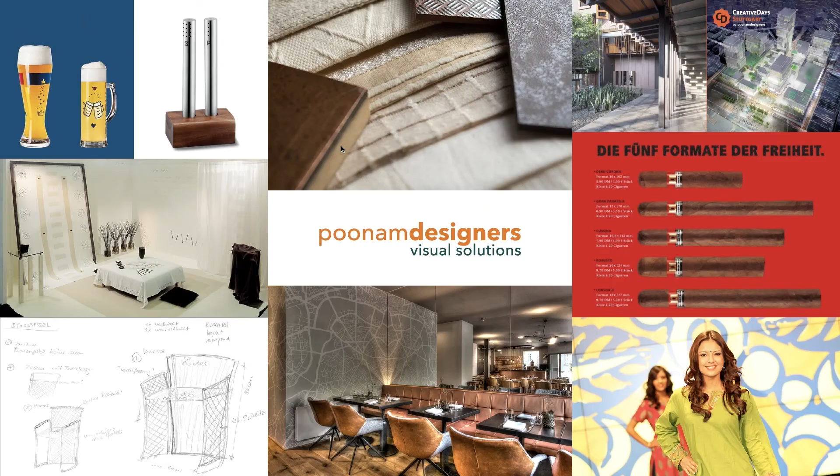We founded the studio in 1994, and since then our interdisciplinary studio shifted its work from textile and product design, communication design, to product and interior design, visual communications, research, installations, curation, and events.

And from the beginning with us - now Ravi, it's your turn. Our son Ravi, are you somewhere here? Supporting us with his input and everything. He's also studying architecture now, so it's great - it's like a family business now.

We work across the disciplines and intercultural. We think local and global, and we think in context. And we love the slogan by Eliel Saarinen, who said it perfectly: always design a thing by considering it in its larger context - a chair in a room in a house in an environment in a city plan.

What drives us? Our passion for interdisciplinary design projects and our never-ending curiosity towards other cultures. We believe in a holistic way of looking at design and architecture. And for this, we founded the Creative Days in 2016, an interdisciplinary and international platform, giving design, architecture, and urban planning a platform for exchange, networking, and presenting out-of-the-box projects and people.

This platform consists of a symposium and different events which explore design and architecture at different locations in Stuttgart. Usually it takes place in July during the Indian Summer Week, and as I said, we are delayed this year. One of the guest countries is India because of the town twinning between Stuttgart and Mumbai.

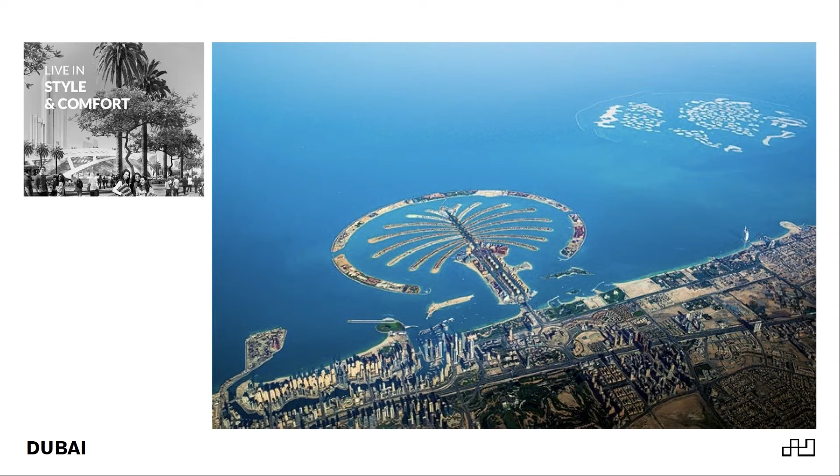You may even see 'live in style and comfort'—that's the advertising of something like that. That is not necessarily the kind of city we hope for.

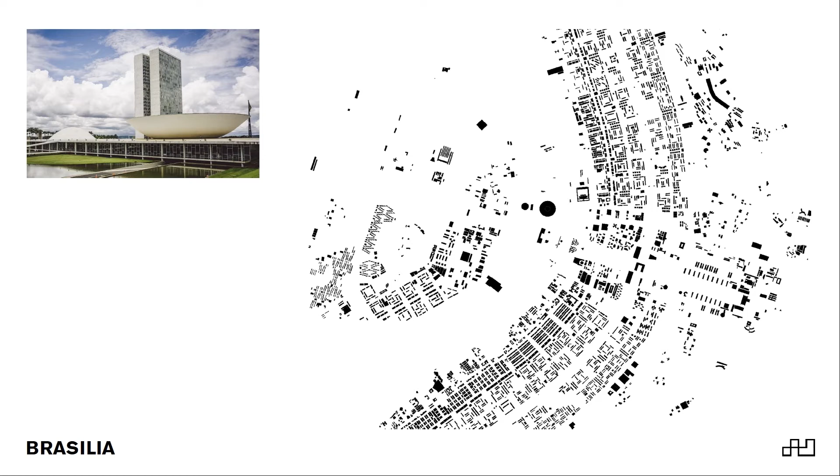I think the experience of, for example, Brasilia, which is a city that was planned as a structure from its very beginning, shows that a structure planned from its beginning and carried out exactly as planned is somehow working, but it is not something where people say, 'Oh, this is a city where we like to live.' That is not a city that is lively or interesting, except for its outstanding punctual architecture. But I think as a city, it is very much a problem.

And other cities start from a very clear plan, from a center—this is a screen, meaning the point doesn't work here, right? So I have to... you think it doesn't matter?

There's no point here. No? Here's a point, here's no point. Good, okay, do we have a mouse? The pointer works, you just saw it. Where do I have to stand that I see it? It's hard to point somewhere where you don't see where the point is. I mean, I don't see the point. Okay, so anyhow.

You see the castle, right? The castle was the center of this urban planning. It started out with this radial system, and it was carried out up to a certain point. From this point onwards, the city was starting to grow. It was no longer a systematic scheme set into reality, but the city was starting to grow.

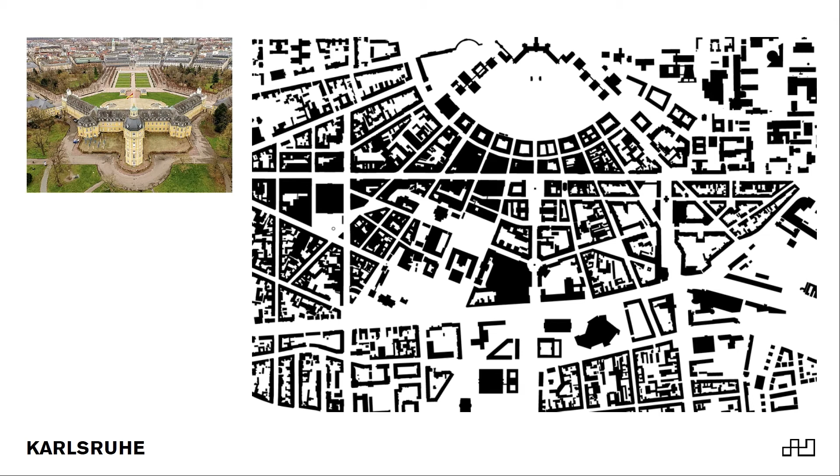This is something different from just the master plan that is carried out through all time. This is something that is working better, as far as I can see.

On the other hand, we have the other way around. Here we have a city that from its beginning—you see the city center, don't you? So this city did not start with planning, but it started with growth. There was something interesting in the way the shore is shaped, something that made people go there and found a city.

And then the ensanche—this is Barcelona, in the 1850s, I think—there was this structure imposed there. But this is something, in its scale, that is a very rare example of planning on this big scale that really works, and the city is really happy with this area.

But still, there is something about growth in the middle, and something about planning in the outskirts, and the city developed further, and then again it started to grow. So it's not about a city planned in its entirety, but one with certain quarters that are either growing by chance, by accident, or planned quarters which continue the city.

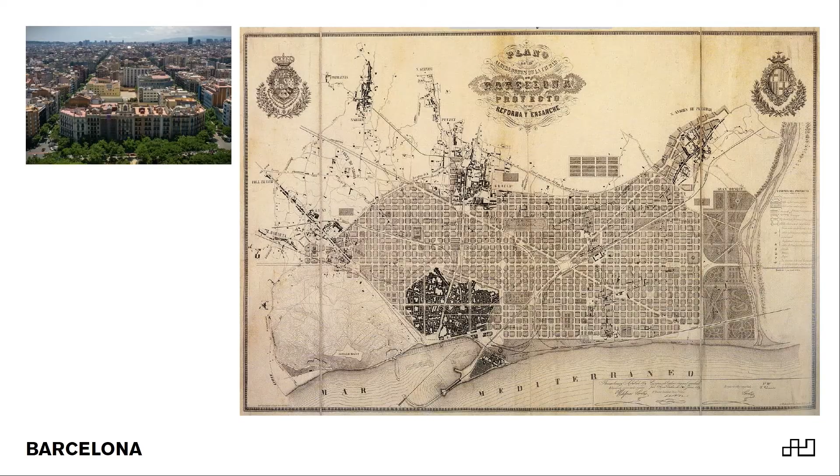And then there's something in the city which is, well, palimpsest—the constant overwriting of an existing area, of the existing ground. This is the most important thing also for the future of the city. We have to know that everything we are doing is not the end of the development. It's just a part of something that will continue to develop itself, so to speak. It's not that we are the masters of the scene, in a way.

I found in Ulm, close to Gingen an der Brenz where I come from, a quite neat example: the Münsterplatz. You all know the Ulmer Münster—not with this tower though. That's the tower up until the 1870s, when the city of Ulm decided to build the highest church tower in the world, and only after that the final tower occurred. That's how the church appeared for about 500 years. They started in 1377. But look at this Münsterplatz.

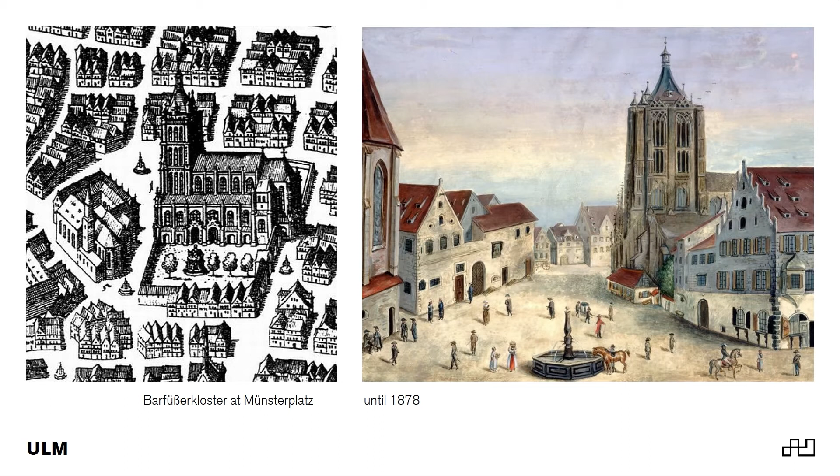To the left, you see there was this sort of cloister area with a small church attached, a framing of the Münsterplatz. Then they tore down this Barfüßerkloster in 1878, and for a long time the Münsterplatz was empty—there were just little kiosks or a bus stop or something like that.

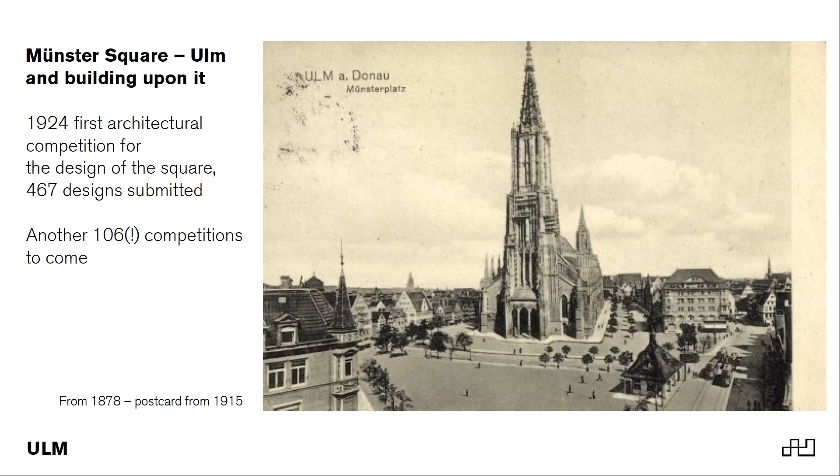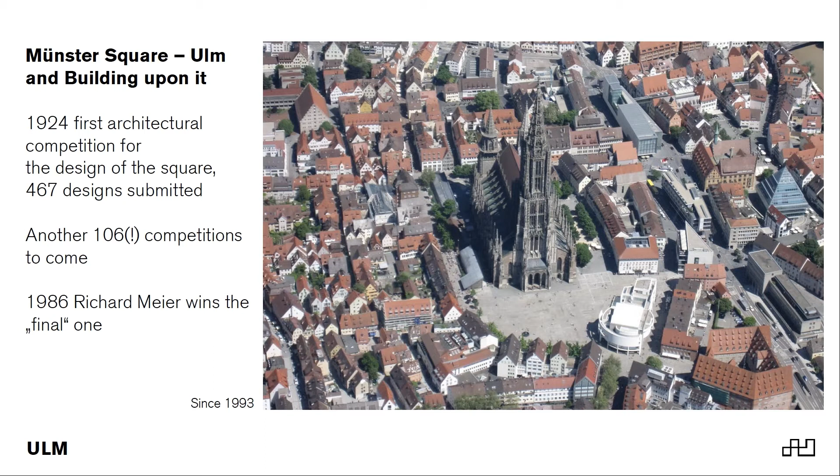For something like 80 years and 106 competitions, they discussed and tried to find out what to do with the Münsterplatz. Only in 1986 did Richard Meier win the competition for what was finally built. So at this point, you can easily say that we have constantly overwritten this Münsterplatz with different buildings, and we are only part of something that is continuing.

Edmund Bacon, in his Design of Cities, described this as the principle of the second man. If you are working in the city, you have to see that you are part of a development, and you have to read the entire scenery. You have to try to find out what is there, try to understand what perhaps your predecessor meant, judge what he or she did, and find your own approach, your own opinion toward that—how you develop it further.

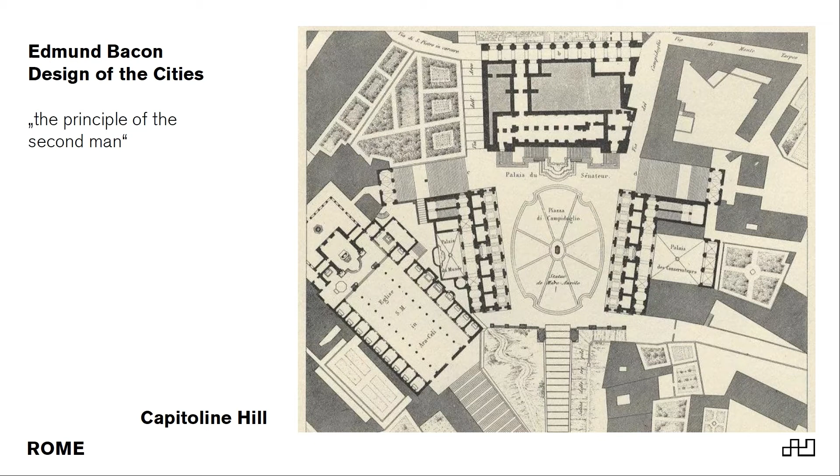He judged that the existing situation to the left was not a good thing, so he put a new facade to the right—not a new building, just a new facade—and to the left a new building, which made him achieve this perfect square, finding an appropriate place for the town hall of the city of Rome. This principle of the second man is something very sympathetic to me.

Certainly the church was no longer, at the time, used as a church, but as a training area for young people.

Now, how do we put this into urban scale? The church being there, we decided: we have the main geometry of the church, with the length of the church being the width of our new building. So it turns out that the church is fully integrated.

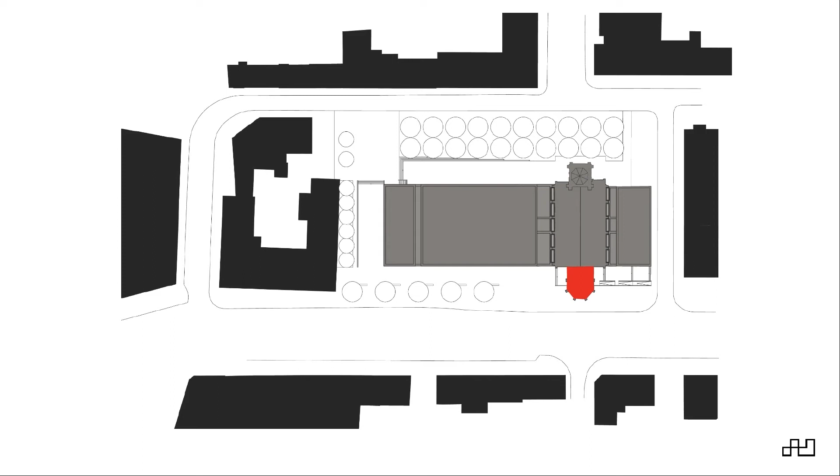The red lines show this—the main facade of the building is stepping back a few meters, opening up a situation for an entrance plaza, and this entrance plaza is governed by the former choir, now being the entrance of the concert hall.

If you look at the plan, you realize the former entrance of the church was on the other side. That is clear for everybody familiar with churches—the entrance was on the other side. So there was this little discussion: is it appropriate to put the entrance at the choir? Because you never, ever have an entrance at a choir.

But this church is no longer a church, so I think the meaning of the liturgy is no longer there. And if you think further back in history, you'll find this type of building was not invented as a church, but as a market hall in Rome, for example. So there is a way of dealing with that.

The entrance is certainly on this side because the main street, Victoriastraße, is on this side. So we have to put this building and the new structure into the system of the existing city.

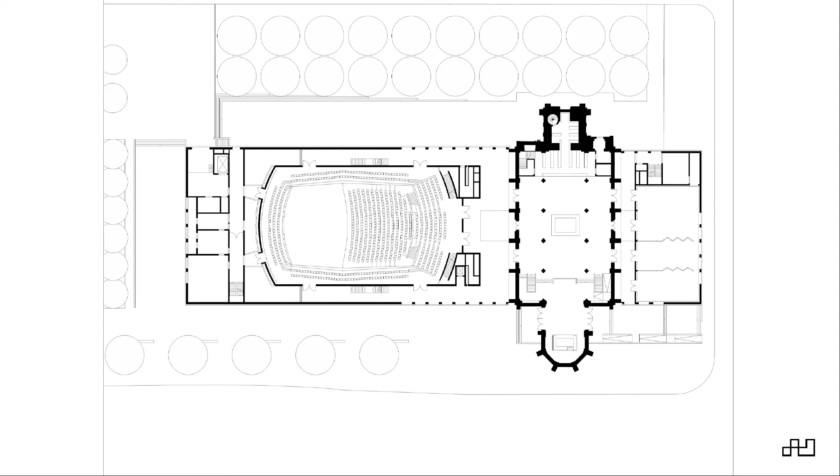So it turns out to be a silhouette where the new masses respect the church. They are lower than the church ceiling, and they respect, with their distance and their seams, the volume of the actual church building.

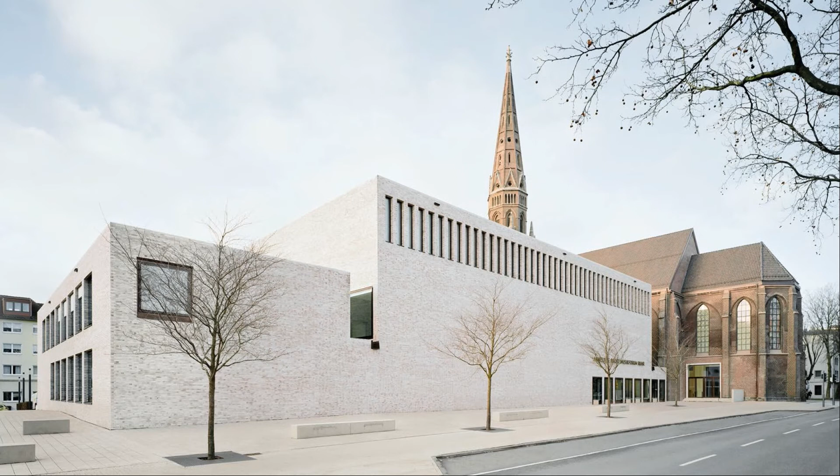So in a way, there's the first man, to come back to the principle of the second man. The first man sets the theme with the existing church, and we have to add onto it, perhaps define the second theme, to make it a unified building.

The interior space is about the composition of highs and lows, and another low, and another high, which is the concert hall. In section, you see this creation of a spatial topography linked to the level of the city, which is the church level, and it digs a little into the ground, which is then the stage level, and also rises up to have the proper volume for the hall.

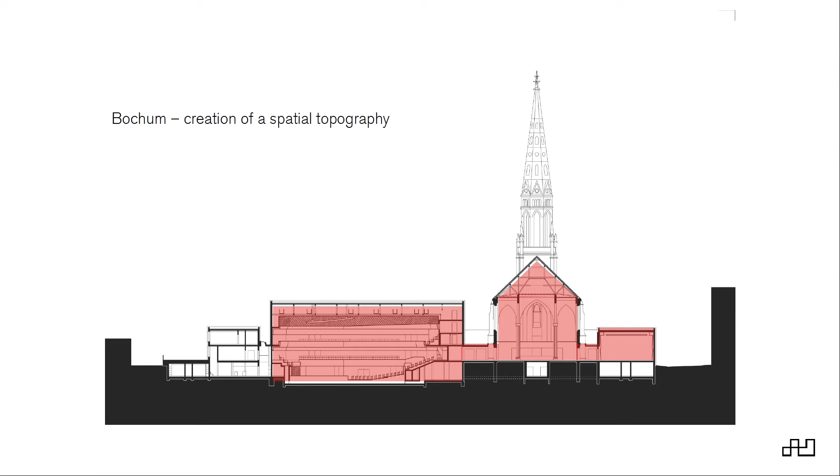Bochum, being a creation of spatial topography, contrasts with the museum in Arnsberg, which deals with a found topography. That is something different, because in this case the topography was the most decisive circumstance influencing the design.

Where is it? Here it is. The entrance is certainly to the left, in the old part of the building. If you have to go all the way down, it's like 25 meters—there is certainly an important path going through the building.

But it's not only the building at its interior—the exterior, the sculpture and form of the building, enables and emphasizes existing paths in the city, leading from the top of the hill, at the top of the picture, to the bottom of the hill, at the bottom of the picture.

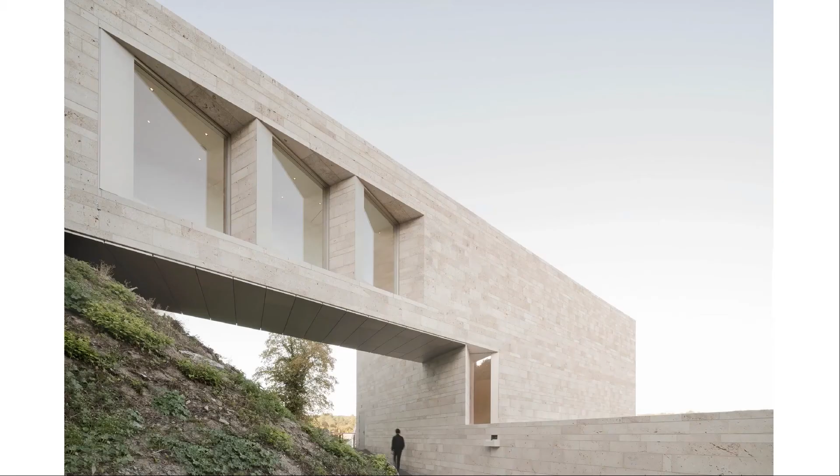And so the building finally shows. You see the stairs, you see the path going in the back of the building, you see other stairs, and you also see this bridge motif, which is not only due to the staircase and the connection of the building, but also to this promenade, which goes underneath this building bridge, where this person is just walking.

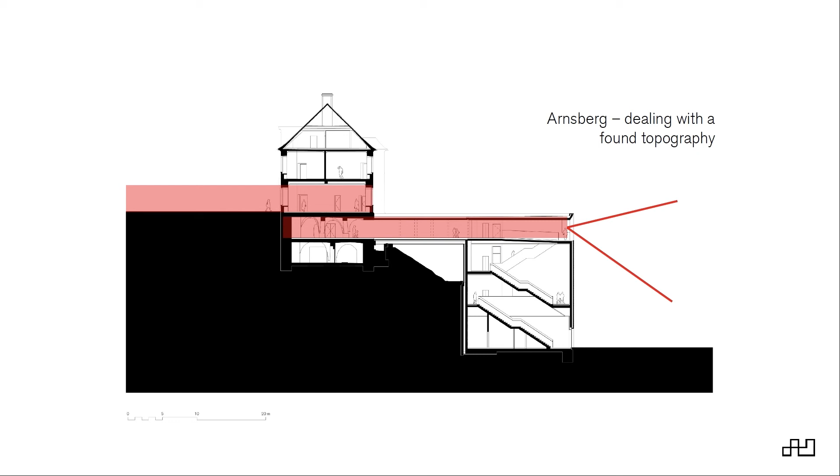The other aspect of dealing with this found topography is the view, certainly. If you enter this building from the city side, it is very harmless, this old one. You wouldn't even think of this huge slope that is coming behind the building.

And so this makes up for a somewhat spectacular view. If you see here in the middle, you see this main street, and that is on top of the hill. It's like a flat surface on top of the hill, like a medieval castle or something. Here it's the city center, and here is our building. We stand in this city center. It's more or less flat, a little sloping going towards north, but you wouldn't imagine this slope.

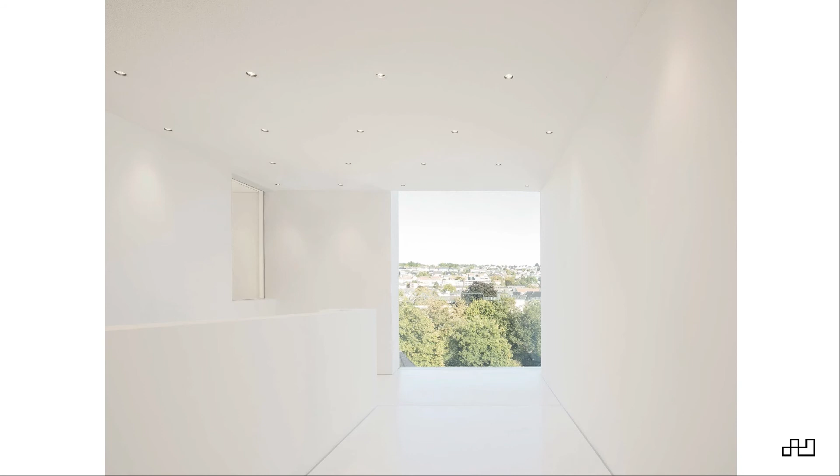You turn right and you're in front of the museum. That's the main entrance of the museum. And you go through it and you have this view all over the valley. That is one of the main things that are interesting in dealing with this topography at this point.

The next thing is how this sculpture works in the city, in the city plan and spatially.

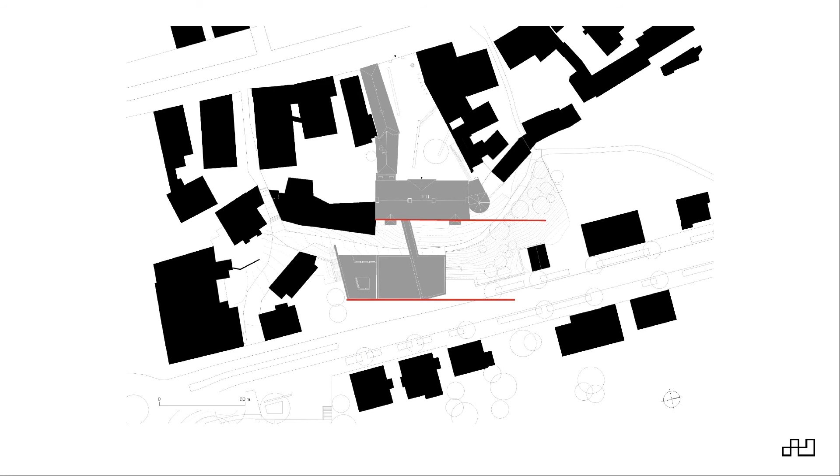In 3D, the sculpture, I think, looks somehow arty, like a voluntary act done by somebody. But it is very closely tied to the street, for example, to the existing direction of the old thing. And so you see that it opens a little square down there relating to these somehow oddly twisted buildings. You also see that it makes a sculpture from relating itself to the city and the existing sightlines.

Now, two projects real quick, two new ones that are not even projects yet. We won those competitions, first prize, followed by 2 third prizes. So we're very hopeful that we may eventually build it. But we still don't know.

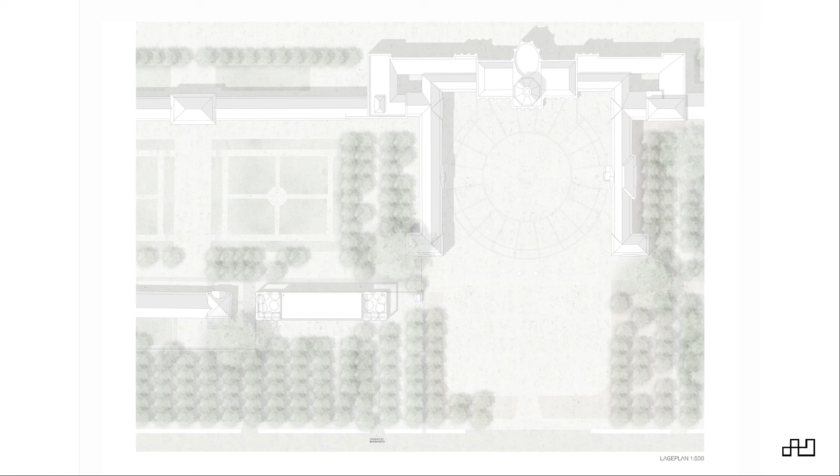So what is it? It is the picture. It's the image that you think of. How can we extend such a castle building? And since it's a completely, it's a visitor center, so it does not really have to do with a castle as a function. It's just to house and inform people.

We thought it's just an adjacent building, like an orangerie, for example. And so we thought, okay, perhaps this is a picture we could work with rather than do it from its functional things. It's a coffee shop, a little bit of ticketing, so the function is not so much design relevant in this case. So we thought an orangerie may be interesting.

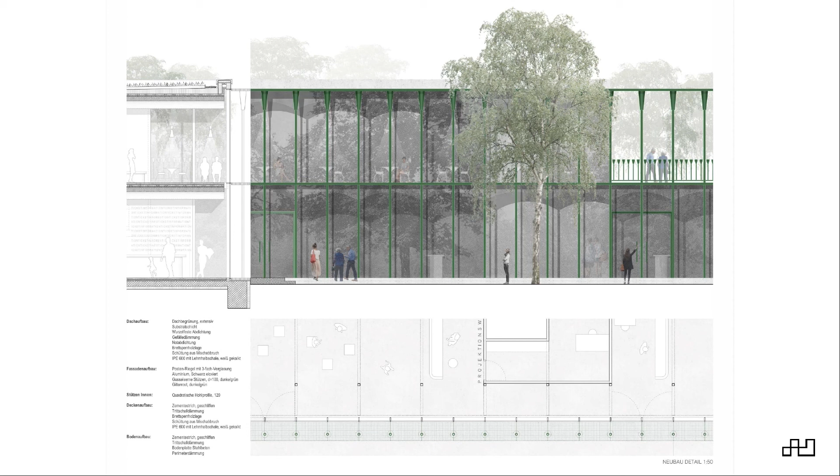And the other thing was that in Preußen they had this Kappendecken, so we thought the interesting thing about it should be the construction. The construction transports the image, and this is the important thing. You see these vaults on the ceiling, and this vaulted ceiling will be the main construction type of this building.

The other one, the most recent one we could win, is the Documentation and Cultural Center in Heidelberg for the Sinti and Roma. Here we have an entire city that is a monument, listed in itself. We have a very delicate site where it starts to slope towards the castle, which is to the right and well known. So the thing is, how do we put a fairly big mass there?

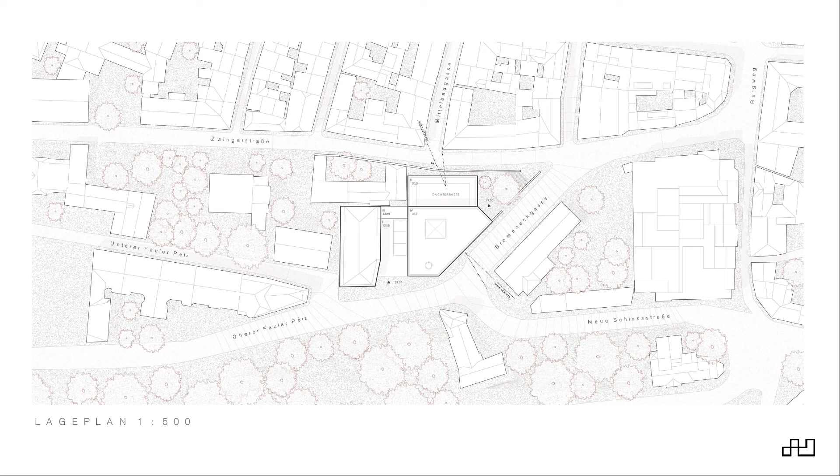Certainly, if you have a client, usually the client wants a big mass on a small piece of land. So how do we deal with that, especially in this old and very delicate city setting? As you can see to the left, there is a little bit of an existing structure we have to add onto, but the main thing is to come up with a new building, and how can this building deal with the city and give something back to it.

We decided, although it seems very evident, we were the only ones to do this front plaza from the tip of the triangle, to design the entry from this position. Although to us it seems very clear, nobody else did it, and apparently that was a main part of the match-winning argument.

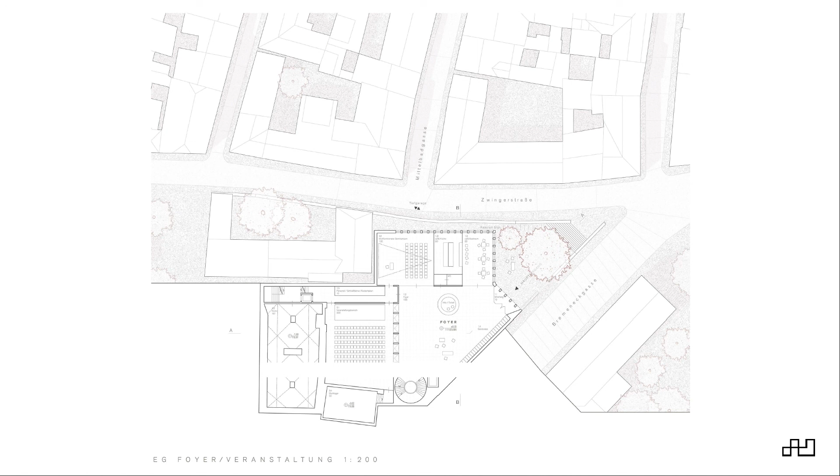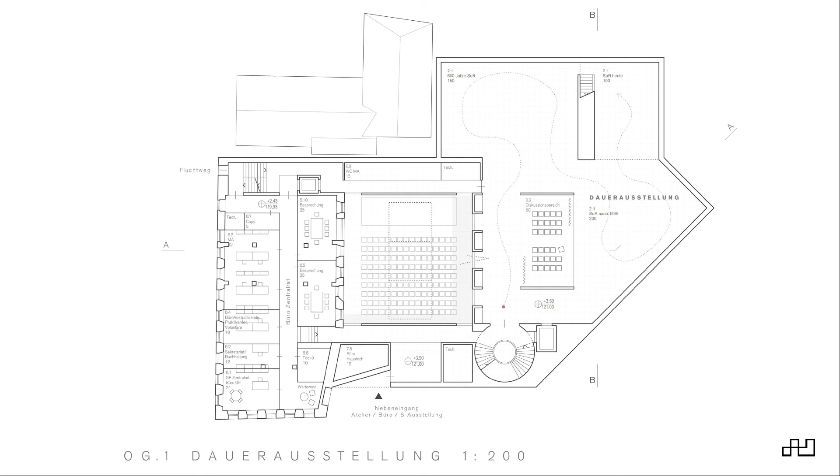Going up one floor, we can see one more important thing: how to deal with an existing structure. You can see the idea of a cloister again. You see this hall-type thing in the middle, conceived more as a courtyard than really a hall, although they want it as a hall. I think it is more a hollow than an actual positive space. Around this hollow you have the hallways that go all the way, so we have an interconnection between the old and the new building.

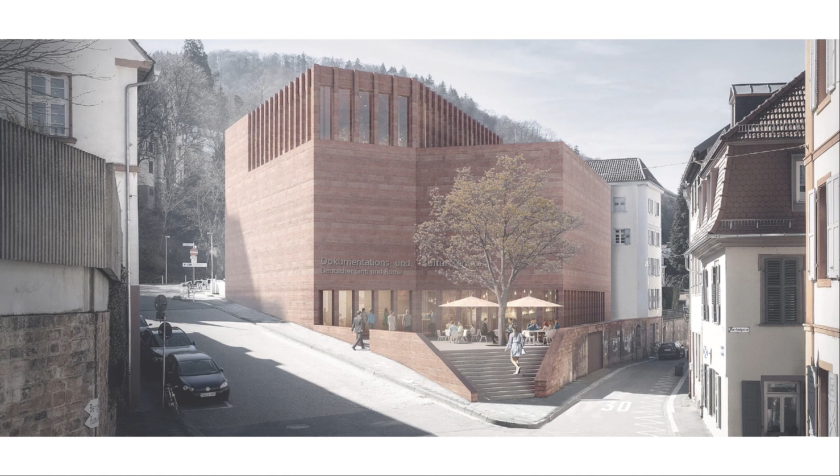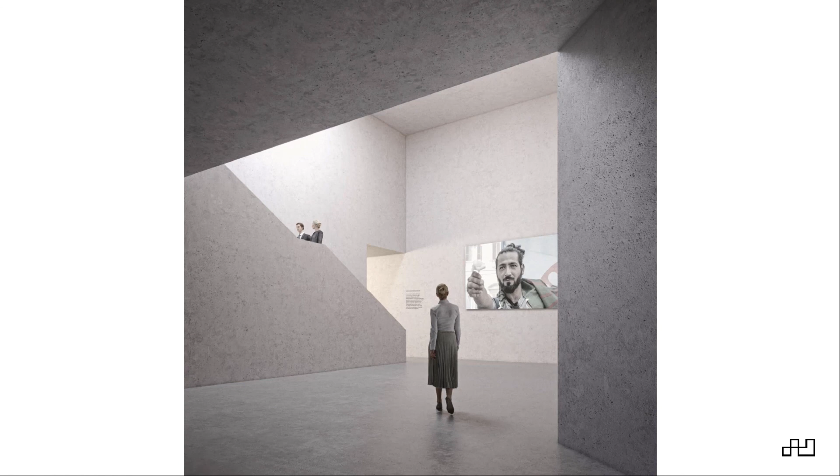And so we were very happy to win this competition, and we will see how it turns out. This is just an image of one of these interior spaces, the museum spaces that we are facing.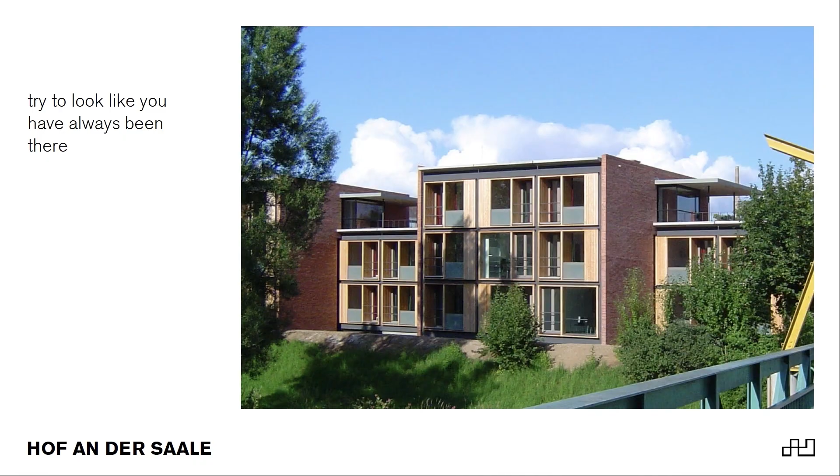And the only reason I dare to show a picture of us at this point is because the chair of the jury who put us in first place for this project, at its inauguration, came to us and said, 'It looks like it has always been there.' This was the best compliment he could ever make to us, and we were very pleased about that. And to end with Luigi Snozzi: there is nothing to invent, everything is reinvention. Thank you very much.